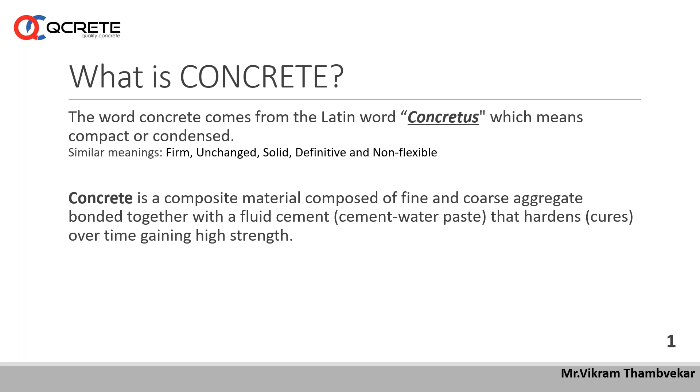This concrete, what it is and other basics, we will not discuss much more, because concrete is a composite material of fine and coarse aggregate bonded together with fluid cement that hardens and cures over time to get high strength, and everybody knows these things. So we'll not discuss much more on these ingredients, basically the type of cement, etc.

Now the point is, use of water for making fresh concrete and using water for curing is very important, because I have seen failures in the Mumbai area because of the use of water. I can't tell you the name of the project or location, but I can share this experience as a case study.

One multi-story building, about five or six floors, was completed, and there was some failure of cubes. We tested all the framing material by extracting cores and other means. After analyzing this material, we found that the concrete used for that RCC frame structure contained a high amount of chloride content, which happened because local people used bore water or well water.

Well, the bore was close to a creek area. So instead of checking the water quality, they straight away used it, and they found some problem with the concrete at a very early age, because the building was under construction.

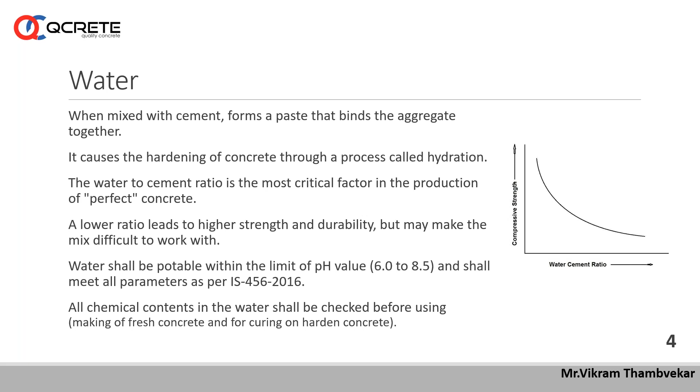If anybody is using curing compound, care shall be taken that all the surface should be moist before applying the curing compound. Then use of cement, minerals, chemical additives, that was already explained very well by Kaushik sir in his last seminar.

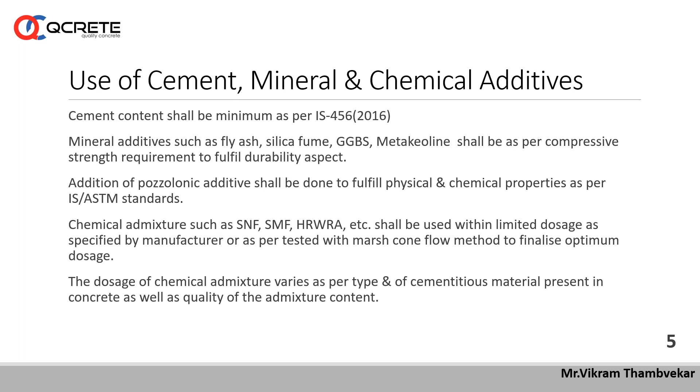I want to say, using quantity of admixture, if it is not in proper proportion, then it may give some adverse effect also. So the use of chemical admixture should be limited as per specification, and before using such a chemical admixture, one should test it for its compatibility with the cement being used.

So this care has to be taken for making fresh concrete. And while making fresh concrete, the sequence of putting material in a mixer, either in an RMC plant, a batching plant, or a regular mixer at site, should be used properly so that all the aggregate, fine and coarse, gets mixed to produce good quality fresh concrete.

To get flowability and workability, the admixture we are using should be used in a proper way. Before using chemical admixture, it should be stirred well so that all the solid contents get mixed with the concrete or with the water. If you use water and chemical admixture together, it gives a better effect.

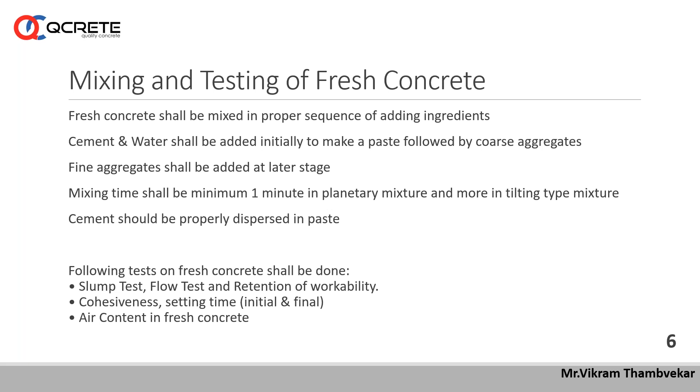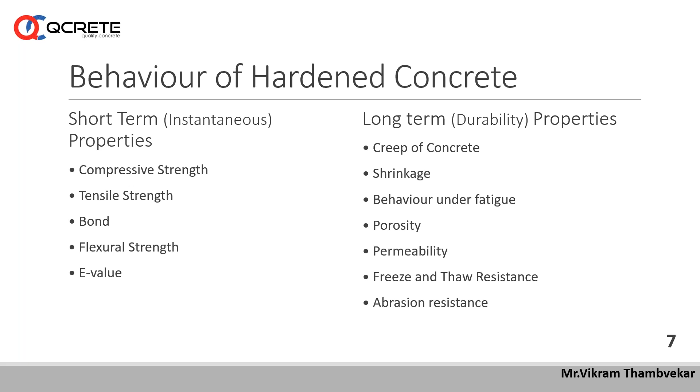Then the behavior of hardened concrete - everybody knows compressive strength, tensile, bond strength, flexural strength, E value, and so many other things that we are regularly testing. We have to run so many tests to get a proper strength of concrete.

We'll see further the factors affecting strength of concrete, etc. There are n number of reasons to make good concrete, and of course there are n number of reasons to lower the strength of concrete also. So these things are mentioned on our slide.

So instead of reading all these things, I'm going further, because the use of fine aggregate, volume of paste, etc., that everybody knows. The temperature effect and percentage of additives are also very important factors for making fresh concrete.

I have observed at one site, a very reputed company and reputed concrete supplier, a higher grade of concrete was used, and there was no final setting for more than 30-40 days or 60 days. When we saw that the final setting had not taken place, we came to know it happened because of excessive use of chemical admixture.

So while making fresh concrete, the use of chemical admixture should be restricted, and as per compatibility of the concrete itself. So for making fresh concrete for higher grade concrete, it is necessary to conduct trials at site, and then go for making fresh concrete for regular use in formwork.

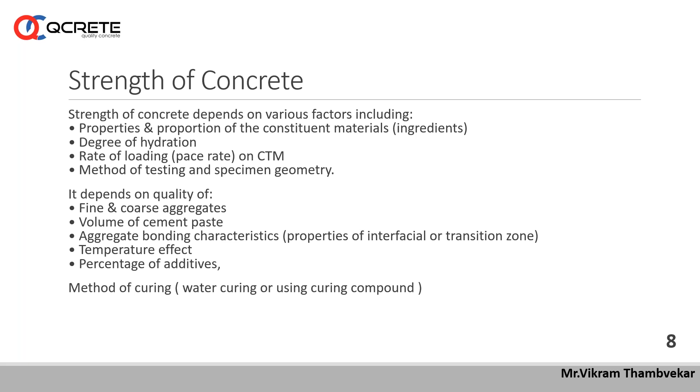The types of concrete are many: plain concrete, normal strength concrete, high strength concrete. Normal strength concrete nowadays for RCC is generally about M20 to M40, and below that, M20, these are the regular concretes used for PCC and other non-structural uses.

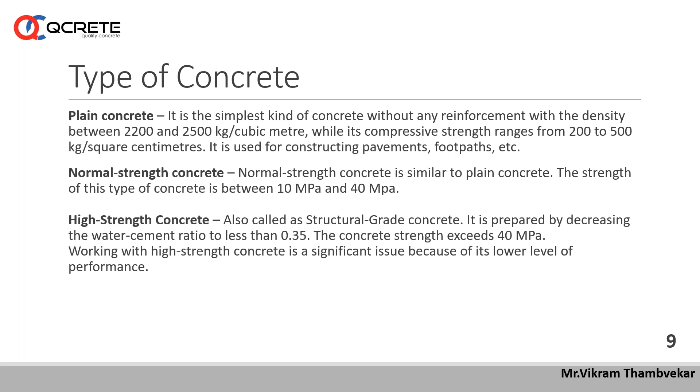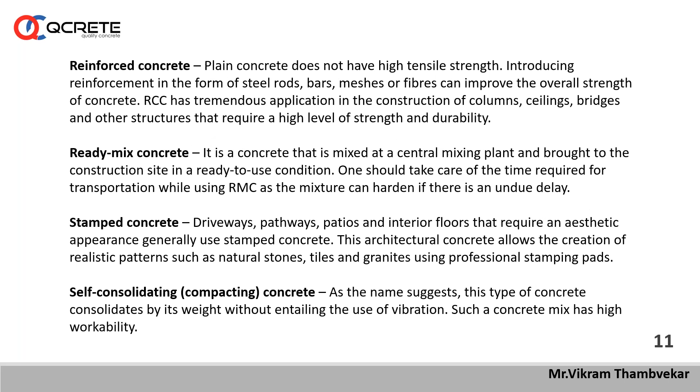So plain concrete, normal strength concrete, high strength concrete, then high performance concrete, ultra high performance concrete, early strength concrete, roller compacted concrete, reinforced concrete, ready-mix concrete, stamp concrete, self-compacting concrete. There are so many concretes being used as per project requirement.

Especially lightweight concrete - its use is required in some special cases where, as per the design of consultants, it is essential to go with lightweight concrete but with proper strength.

Here I want to tell all these attendees that I have provided a design for lightweight concrete, which was used for making a canoe. The canoe was cast by some college students to send it in a competition - an international competition in the USA. So we constructed one canoe with lightweight concrete in Mumbai, at Mukesh Patel Engineering College in Andheri.

That canoe was 450 mm wide by about 5 meters in length, with a wall thickness of hardly 40-45 mm. The canoe was tested in a lake. It was floating very well without any problem, without any leakage of water. The density of that lightweight concrete was only 1100 or 1150.

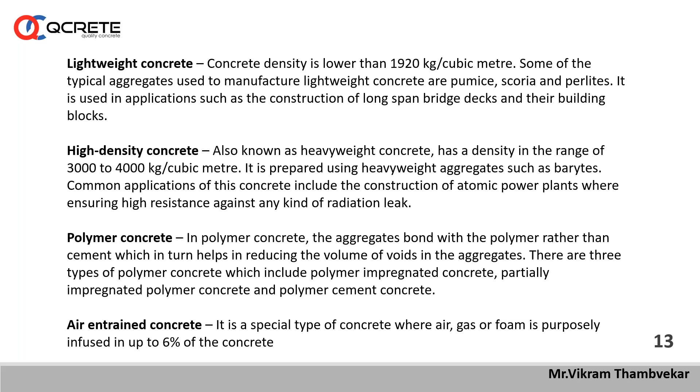So these are the things. High density concrete is used for foundations and other special cases. Then polymer concrete, where people use some amount of polymer, which also depends on project requirement, air entrained concrete, and other things.

Vacuum concrete or Trimix concrete. I want to explain that for industrial warehouses or industrial flooring, people are using Trimix concrete in large quantity. But I generally suggest users avoid using Trimix concrete for this purpose, because they add more water in the concrete while placing it, and thereafter vacuumize the excess water to make it hard. But in concrete technology, using more water increases the water-cement ratio, which disturbs the strength of concrete. Adding more water and then removing it after some time creates a number of pores in the trimix floor area. So this technology of trimix concrete is not much more advisable.

Then pump concrete. Pump concrete requires a slump of minimum 150 and maximum up to 250, 300, 400, depending on the length and height of piping or the structure where you are placing the concrete. I want to tell our friends to avoid pumping concrete in hot sun when temperature is very high, say about 35 degrees, because the MS pipes get very hot. Even though there is very good flow and workability in the fresh concrete, the heat of hydration in the concrete coming through the pipes causes it to start setting at an early stage, and finally it creates difficulty for pumping.

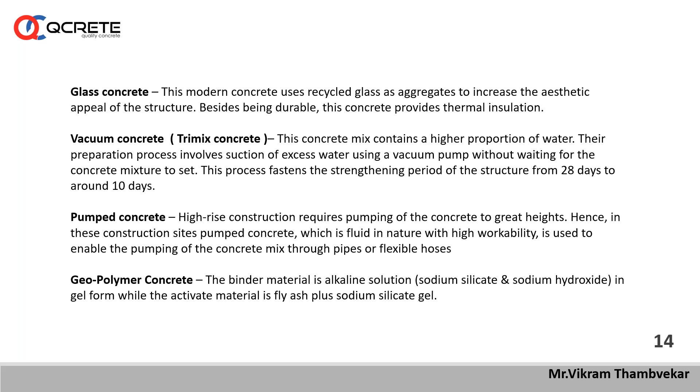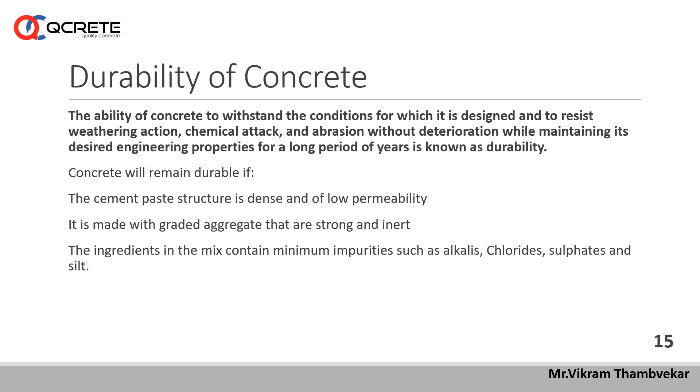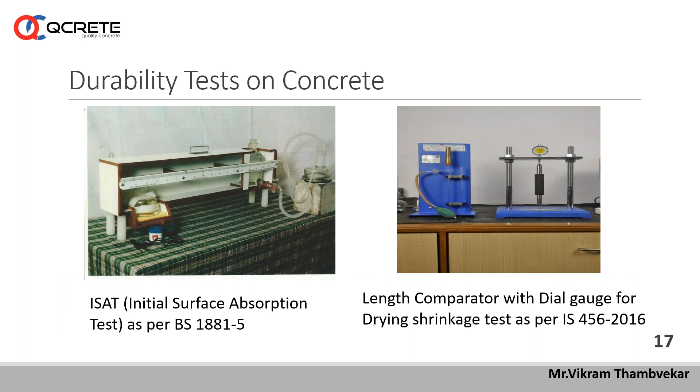Durability of concrete is also a very important aspect of its use. For all high-rise buildings, various durability tests are followed everywhere. In Mumbai area, for high-rise buildings, very reputed project executors regularly test durability, like RCPT, water permeability, ISAT, drying shrinkage, and so many things. Because if proper durability testing is not done, there will be problems, as it is a very important factor for high-rise buildings.

The factors affecting durability of concrete depend on various parameters: cement content, other binder content, quality of aggregate, quality of water, and use of admixture, type of admixture, etc.

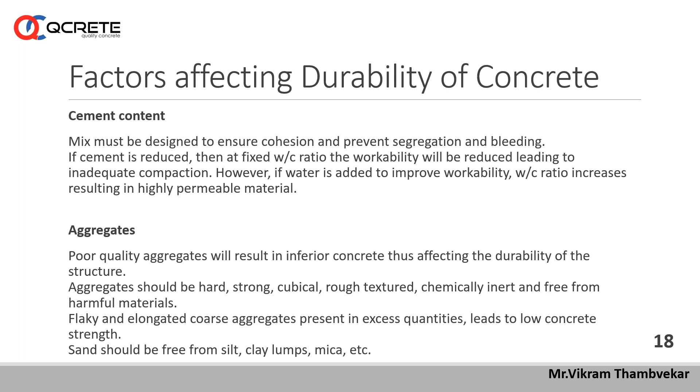When RMC is supplied at site as fresh concrete of very good quality, if proper precaution is not taken to discharge the concrete properly, achieve good compaction, and good curing, durability is affected, as well as strength, and finally durability also affects the structure. So we have to take care of all these practical uses of concrete at site, even though very good quality fresh concrete is delivered. I have seen that because of wrong application at site, many problems have arisen for structures.

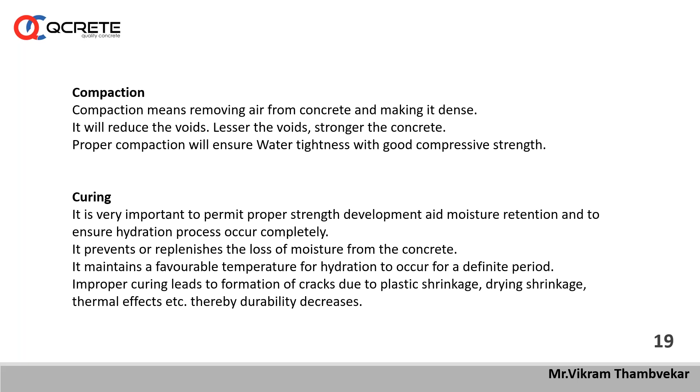Curing is also a very important factor. All project people should use only potable water, or if well water or bore water is used, its pH and other parameters like chloride content, sulfate content, and so many things laid down in the code should be checked properly, and only then can that water be used to make fresh concrete or for curing.

Permeability is related with the durability. If you are checking the permeability of concrete, if high permeability is there, then of course there is a reduction in strength of concrete. So make a proper concrete with the proper design, proper compaction, and proper cover, etc. There are so many things which many people know very well.

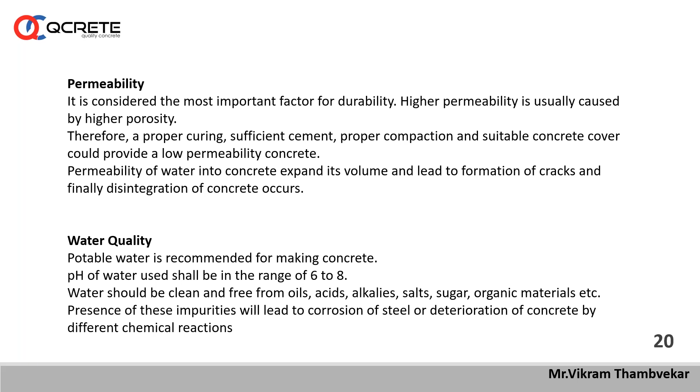Again here the point has come that water quality. Quality of water is mentioned in IS code, that the pH should fall within the range of 6 to 8, and instead of going for all this, the water which is used for drinking shall be used straight away to make fresh concrete, as well as shall be used for curing purpose.

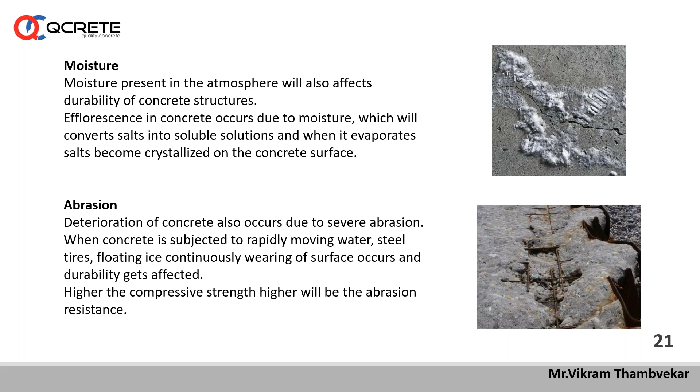Then other factors affecting the durability, that is the moisture content, abrasion, carbonation, wetting and drying cycle, alkali aggregate reaction, silica alkali reaction. See, in Mumbai region and in most part of India, apart from the North Indian part, we are getting very good quality of aggregates, which we are using for making fresh concrete.

Here we find better quality of aggregates as basalt stone is available, whereas in North region, at many places, the stone quality of aggregates are not good. At many places we observe it contains some amount of silica, so such type of aggregates shall not be used. This particular precaution has to be taken where project is going on in North India, especially in North India. I have visited some sites and observed good quality of aggregates are not available. But in the rest part of India, we are getting very good quality of coarse aggregate and very good quality of natural sand also.

In Mumbai and surrounding areas, and in many places in Maharashtra, nowadays river sand is not available, and people are using manufacturing sand, or in other words, stone dust or crushed sand. While using crushed sand, it has to be tested with sieve analysis instead of using it blindly. And if better quality of crushed sand is not available, then use of crushed sand should be limited as per the mix design requirement, or to meet the other parameters of the fresh concrete and better strength level also.

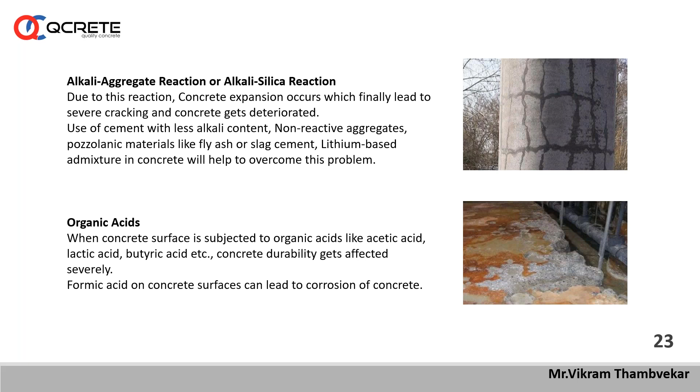Secondly, precautions for raft foundation casting. For many high-rise buildings or industrial buildings where raft foundation is there, with larger size and where depth is quite big, that is above 1 meter, 1.5, 2, 3 meter. In Mumbai, for high-rise buildings, we have seen some depths of raft foundation were 2.5 meter up to 3 meter also.

So it's not possible to make concrete in one stroke for all this volume, because the volume of concrete is very high. So concrete is poured in different stages, or at site some pockets or areas are prepared to provide the concrete for this raft, as the volume is very high.

So while putting this fresh concrete in a high volume, it is necessary to check the temperature of fresh concrete which is poured, because due to the high volume of concrete, the CSH gel forms and creates a very high amount of heat of hydration, and due to heat of hydration, there are chances to develop micro cracks or hair cracks in the concrete.

To control the heat of hydration, in many mix designs, fly ash and GGBS are being added. And of course, before using all such cementitious material, necessary trials should be conducted to ensure the strength level as well as heat of hydration and air content also. So temperature monitoring is a very important factor for this raft foundation.

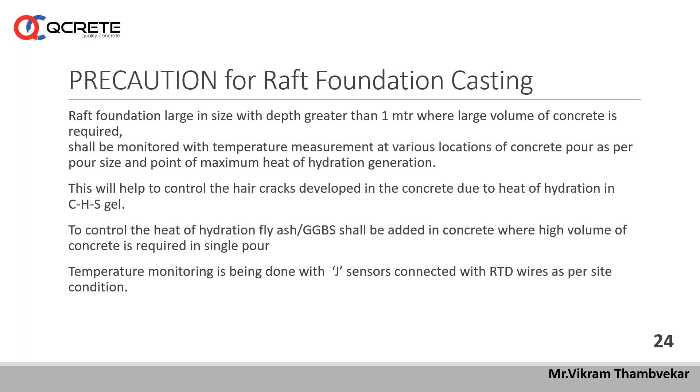Nowadays there is one terminology being followed in the field, that is performance based concrete. Now anybody will ask, what is performance based concrete? Some consultants assume or insist to put some amount of silica fume, Alcofine, GGBS, etc. apart from OPC or PPC. So how does it get benefited?

Of course that benefit is very limited when these additives are used up to 8%. But if you are going beyond that, it gets benefited to a certain amount. But whether it is required or not, for up to M40 concrete or M50 concrete, as far as my knowledge is concerned, it is not required at all, if we are using very good material and a proper mix design.

See, we have produced up to M50, M55 grade of concrete without using any cementitious supplementary product such as silica fume. Only fly ash we have used in a certain percentage to get good workability and good paste, to have a good finish and good strength also.

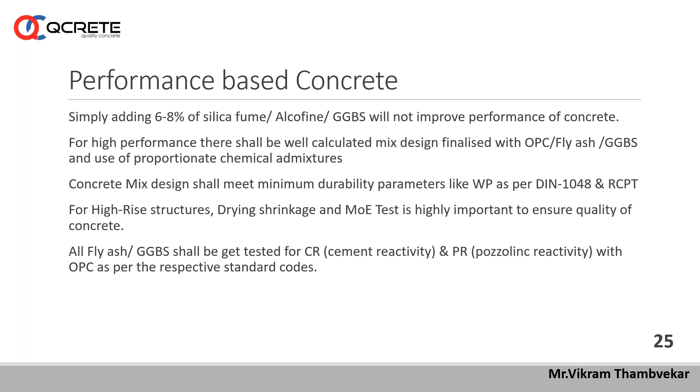Further, when we are putting fresh concrete in projects, we are casting RCC frame structures. Somewhere what happens, people get less compressive strength at site as they cast the cubes of fresh concrete.

But casting of cubes with fresh concrete is also very important. If anybody is not casting cubes properly, even though the fresh concrete supplied at site is very good, wrong practice of casting the cubes or not compacting them properly as per methodology—that is 20 strokes, 30 strokes—and if the cubes are not of proper shape, or if the cube mold itself is not tightened properly, the shape gets disturbed. Secondly, if cubes are not cast properly and not cured properly, it directly affects the strength of concrete.

And then people worry about why the strength came out this way. So to ensure what the concrete has provided in the frame, like a beam, column, slab, or foundation, etc., there is a procedure to check—some test at site that is called non-destructive test, which everybody knows.

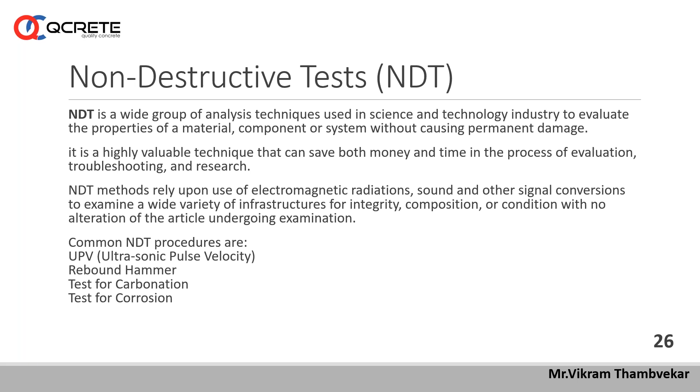With the help of rebound hammer, we can determine the apparent value of compressive strength, and then decide whether the concrete is acceptable or not. As well, with the help of UPV, we can determine the density of concrete. Because if concrete is not properly compacted, there are chances of honeycombing or porosity in the concrete section, which can reduce the strength of concrete. So with the help of NDT, it should be determined, and proper remedies can be applied.

The process followed here is a direct method, and another method is the indirect method. In the indirect method, there are different calculations, and of course some amount of 0.5 kilometer per second velocity was to be added, as given in SP 23. Now that factor has also been removed. So as far as possible, better to check the UPV test with the direct method, and wherever that is not possible, one can go with the indirect method. Readings should be taken properly, and all measurements of distance should be measured properly to calculate the UPV values.

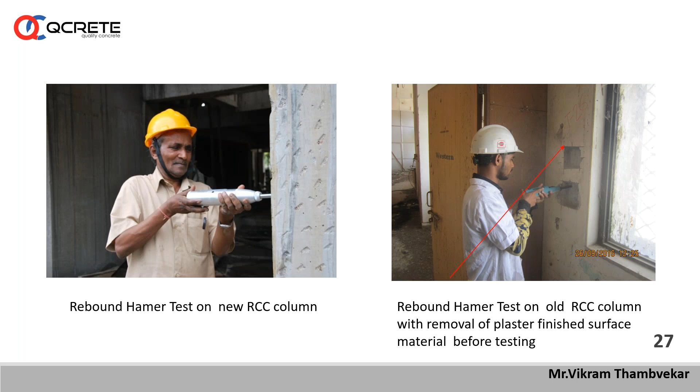I have seen at many places people using the hammer test directly on plastered material, or following the UPV test directly on plastered material, which is totally wrong, because we are not testing the finished material but the original RCC structure to assess the position of the structural member. So these precautions anyone should take—remove all finished material, prepare the surface properly by making it smooth, removing greasy or oily material, etc. These things are very important to take care of in testing methods.

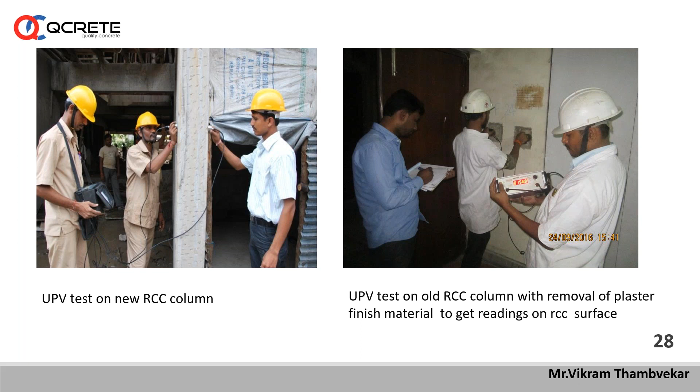Here I want to explain that even though in a local area with local material, we used a very good fresh concrete by controlling water cement ratio and proper proportioning of the local material. This site is very close to the sea, at a coastal area in Raigad district of Maharashtra. This particular canopy is still there without any problem, without any cracks. Of course, a very light section was used. The thickness of this cantilever slab is limited to 150 mm to 100 mm, and the grade of concrete was not more than M25.

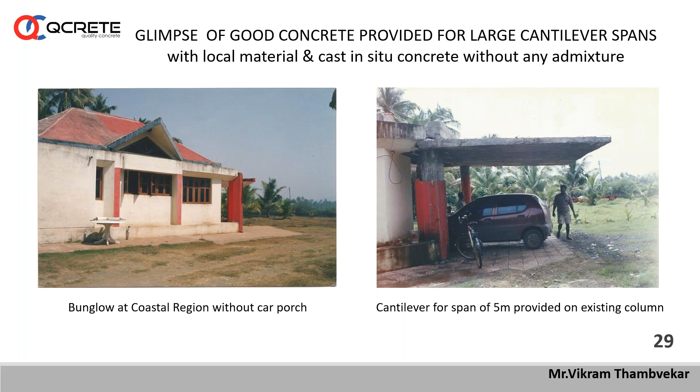So even though we produce a very good concrete, or procure a very good concrete from RMC plants, if we are not using it in a proper way at site, many problems can happen. One should not blame the concrete supplier, but should see what went wrong at our site, how the people have worked or executed the job.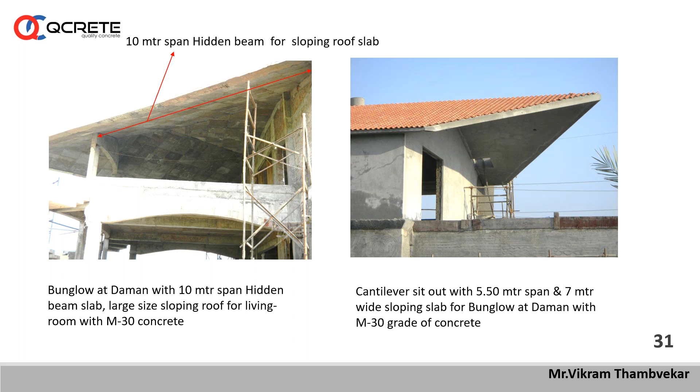For this mix design, we used only 10 mm down, meaning 6 to 8 mm size aggregate obtained by sieving from 10 mm down, and of course cement content along with some mineral and chemical additives. We used these, and the steps of this entire spiral staircase are only 75 mm thick, only 75 mm thick.

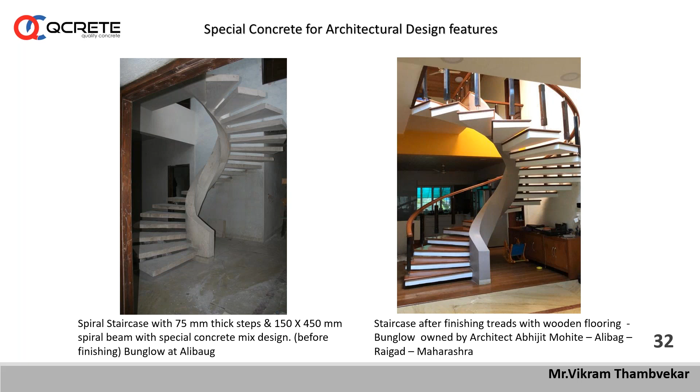Thereafter I want to discuss what causes failure of concrete structures, which we have discussed at some level before. Incorrect selection of concrete materials may be a main reason of failure, as well as errors in mix design calculation and preparation of fresh concrete, improper construction techniques, and insufficient quality control and supervision. Then there are chemical attacks on concrete structures, incorrect construction joints, poor compaction, poor curing, and chemical attacks due to chloride, sulfate, acid, carbonation, alkali reaction, etc. These are the main parameters.

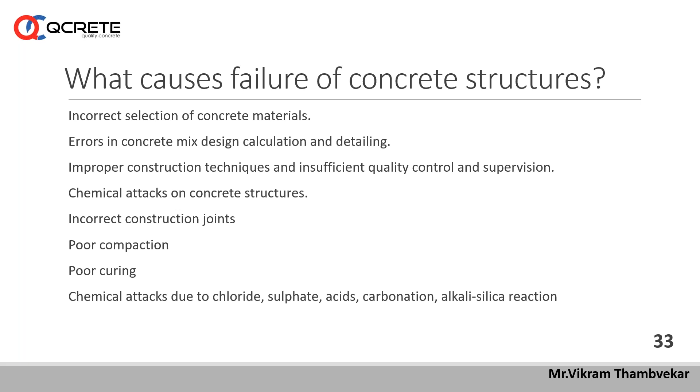Here we can see the concrete is being discharged from height without using any chutes. What happens when we discharge concrete material from higher up is that all the cohesiveness of concrete gets lost, and the coarser material gets separated. So indirectly we can say segregation takes place. Because of this wrong application there is a problem with the structural strength, durability, or serviceability.

So in this case we can't blame any RMC supplier or concrete supplier, but precaution shall be taken at site to place the concrete in a proper order by making chutes, and all the slurry and finer material should be discharged properly and mixed with the concrete, and compaction should be made properly.

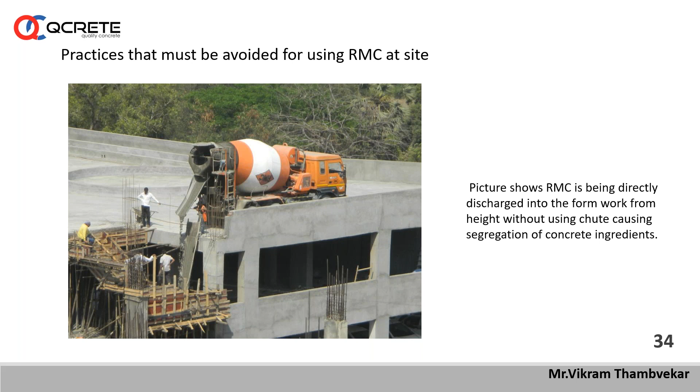So here I again and again explain to all these attendees to use fresh concrete, either made at site or delivered by RMC. Here I can show you one slide as an explanation of how things go wrong when your mix design or something goes wrong at the production level. Why this happens, I'll tell you in the next slide. So let me start this video - please look at this video very carefully.

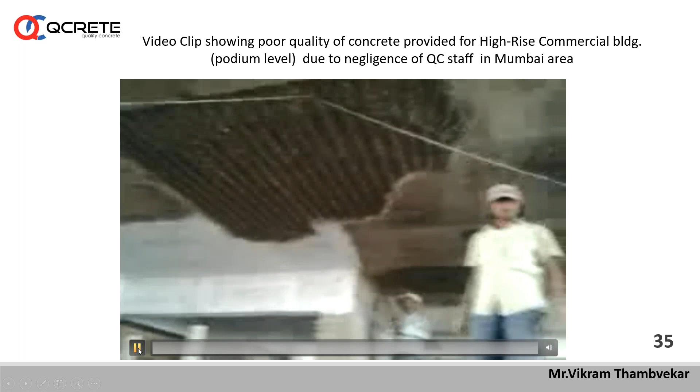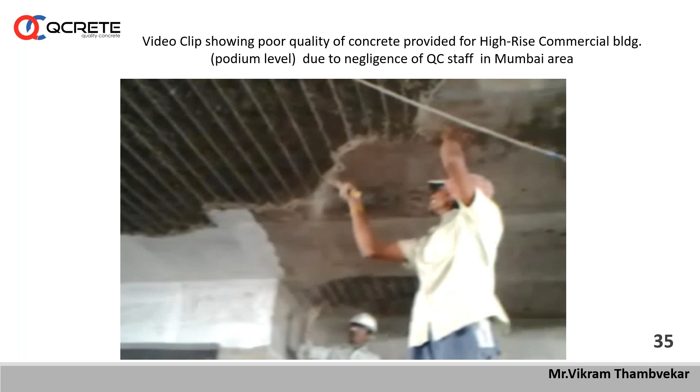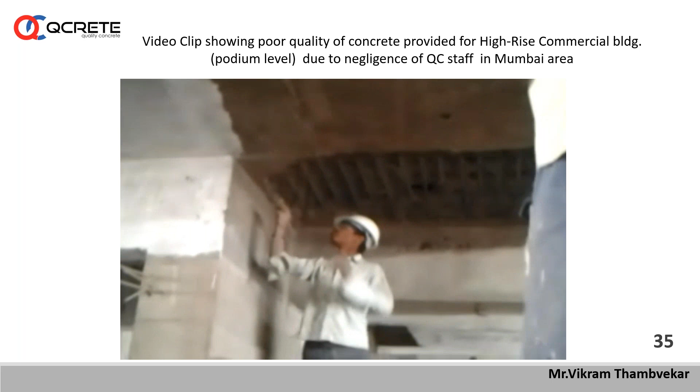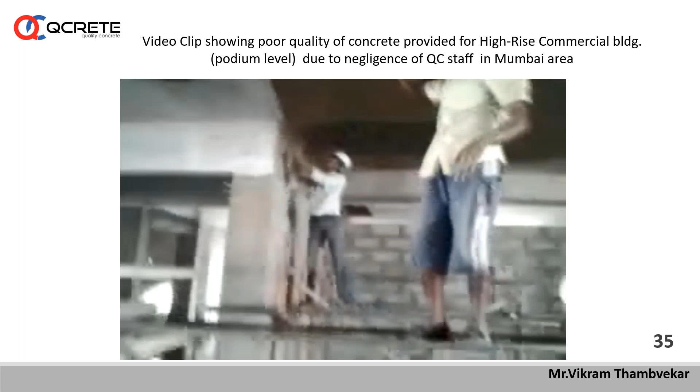Dear friends, see here the concrete provided for this slab, this podium slab. This person is removing the concrete very easily with the help of this tacha, or hammer - a pointed hammer. If this concrete was properly mixed, with correct ingredients like cement, then this would not have happened. We can see very easily he can remove the concrete, and all this powder material is coming out - only powder material. It has not bonded at all. Look at this video till the last, then you'll find there was no proper mix provided.

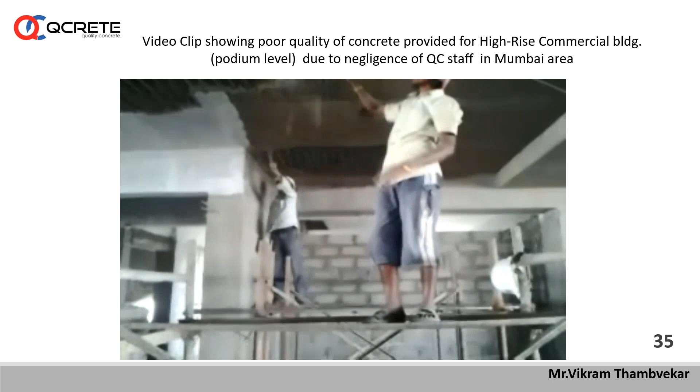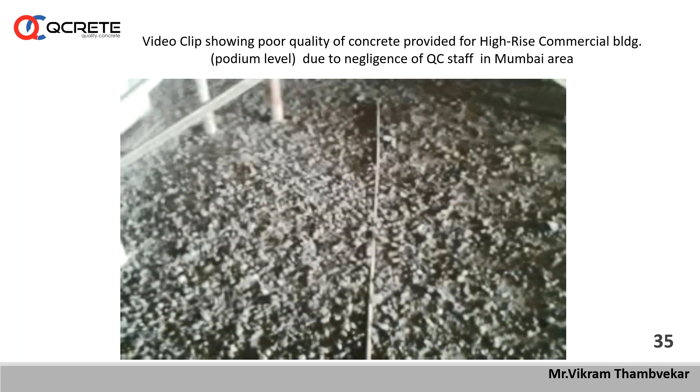Before using it for this particular slab, no one has taken care to check it at site. See here, all this aggregate has fallen here, and these aggregates are totally free from paste. There is no paste of cement or any cementitious material. It means there was no bond between the coarse aggregate and the cement paste.

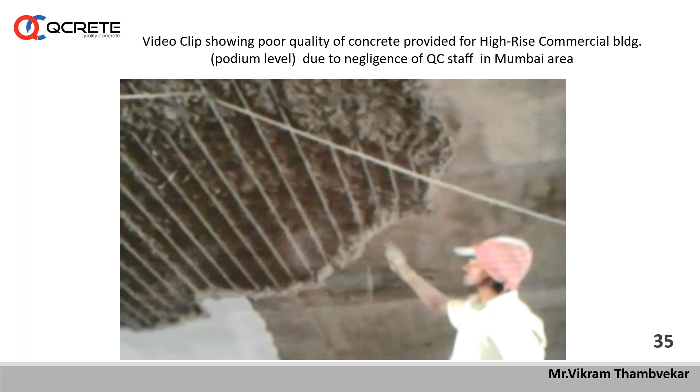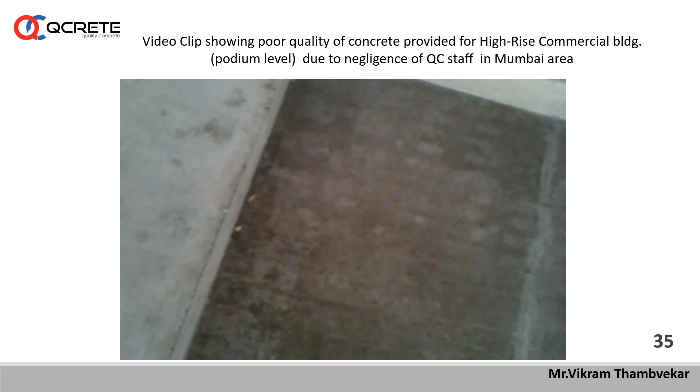So these things can be avoided by taking care to make fresh concrete. The users of concrete should also take care that before using such concrete directly into the formwork, they have to test at site or observe the quality of material. Expertise is required to understand the nature of concrete, and only then can they judge whether this concrete is okay or not. So some tips are there, I'll show you here.

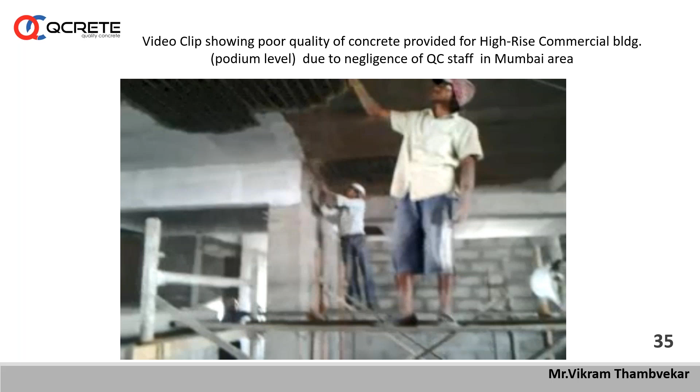See here, another picture I'm showing you. The people used fresh concrete at site without checking anything, and that slab got sagged - a number of cracks were observed. When we tested it, we found the concrete was not proper, so we told the client to demolish this particular slab and recast it with good concrete. Of course, while recasting any RCC member, care shall be taken at joints because it's a dry joint, so proper care shall be taken while putting fresh concrete near hardened concrete.

So these precautions are to be taken. Before using any concrete for anything, it should be tested properly in the fresh state also. One should have good expertise to understand its cohesiveness, to understand segregation, to understand bleeding of concrete, etc. That comes from following regular good practices at site or making trials in a laboratory or a site laboratory.

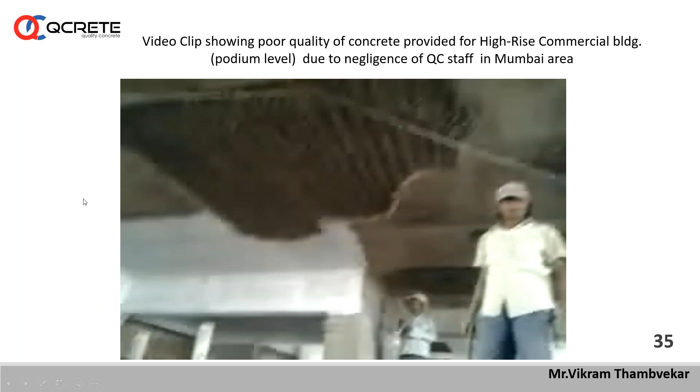I want to explain that manufacturers should take proper care to discharge cementitious material into the correct silos. Generally the bulker comes late at night, and an unskilled person like a watchman discharges it without knowing which is the cement silo and which is the fly ash silo. Because of such bad practice, if different material goes into different silos, your mix design recipe goes wrong. So it is very necessary to discharge the right material into the right silos.

When cement comes from the factory, they issue a test certificate, but some amount of powder material or cement should be taken from your silo or bulker and sent to the laboratory to check properly for cement reactivity, pozzolanic reactivity, or cement strength as per the relevant code. It's good practice to test cement regularly, because when the silo stands in hot sun, there is some effect on it, so periodical testing is very important.

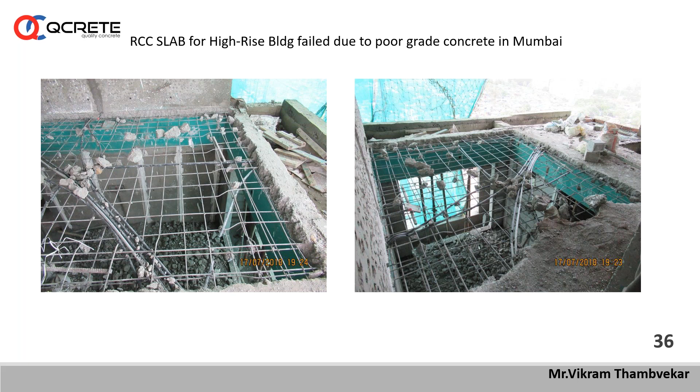Then I explained about contaminated water used to make fresh concrete. Take extra care when using well water or bore water, and it's good practice to use potable water itself.

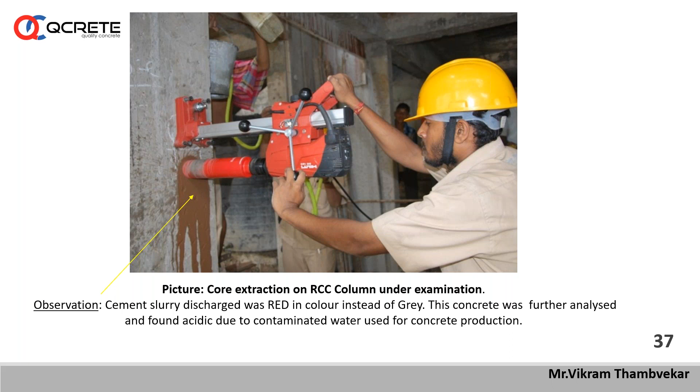We can't say there's a problem with the RMC or the concrete itself. There may be a problem with application, or the finer material was not mixed properly and only coarser material went to the bottom of the column. So placing of concrete is a very important factor that should be taken care of for all types of structures, not only high rise.

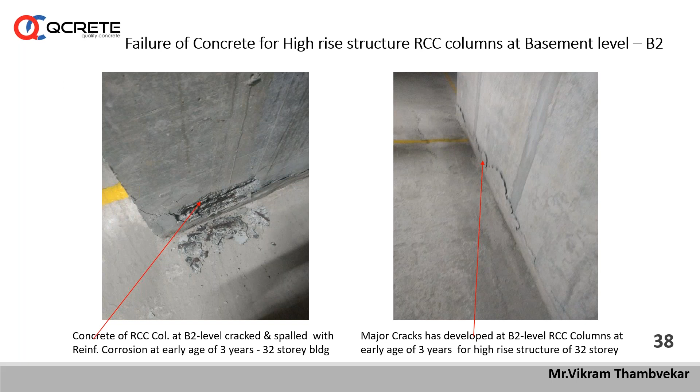In our next slide, a very important topic: precautionary measures for multi-story or high-rise structures. Why am I insisting on all these points? Because I have seen many engineers follow wrong practices while casting the columns and slabs.

I don't want to name any building or project, since that's restricted for us. But in Mumbai, there was a high-rise building, about 20 stories. The project engineer used the same grade of concrete suggested at footing level for all columns and slabs everywhere. Finally, when the cubes were tested, instead of M40, the concrete strength was found to be between M30 and M35, below M40. The consultant investigated further and found all these columns were cast in M30 instead of M40.

So I request all engineers and project heads to keep a practice of studying architectural plans and structural drawings carefully before execution starts at site. Don't hesitate, don't rush. Study all the drawings carefully, and discuss any points with your seniors, your consultant, and your RMC suppliers before placing the proper order of concrete.

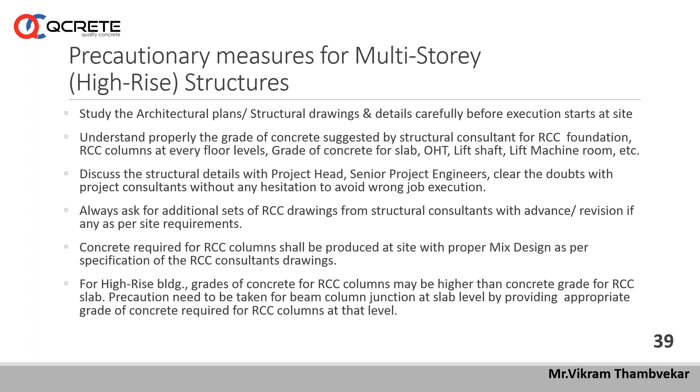This particular point is often not noted by the consultants. So what to do in that case? I have suggested one remedy here to all project executors at site. It is simple but very important, and it should be used very carefully.

If the RCC column concrete grade is slightly higher, say M40, M45 or M50, and the grade of RCC slab is slightly lower, say M30, and if you are not ordering a different grade of concrete for the column-beam junctions, then if you only have the slab grade concrete, a thick cement paste or thick slurry in sufficient quantity should be used.

Sufficient quantity means if you make a very small quantity of slurry and pour it, it won't help. You have to make it in a large quantity, say one or two buckets, depending on the size of the joinery or junction.

This sufficient quantity of slurry shall be added to the M30 grade or lower grade concrete ordered for the slab, with proper mixing, pouring this slurry along with the lower grade concrete together. It should be compacted properly so it mixes with the lower grade concrete, which will improve the strength required for the column and beam junctions to meet the desired grade for columns. As the cement content increases in that particular part, some amount of strength will increase.

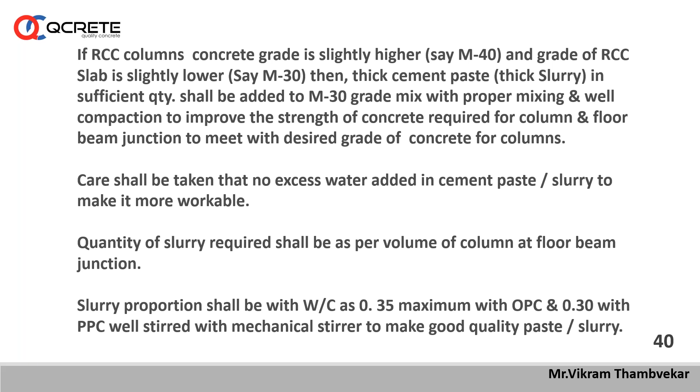Quantity of slurry required shall be as per volume of column at floor beam junction at that particular level. Slurry proportion shall be with water cement ratio not more than 0.35 with OPC and 0.30 with PPC. You have to use a lower water cement ratio for PPC, up to 0.35 for OPC. All the slurry should be very well stirred with a mechanical stirrer to make a good quality paste to add in your fresh concrete.

These are some points I'm going to explain at the site, after shuttering and centering, when reinforcement is placed on the centering and shuttering at slab level or at column beam junction level. Many times I observed oil remains as it is with the shuttering, and coated on the reinforcement provided. So all such oily material should be cleaned very well with cotton waste or cotton cloth, so that bond of concrete with the reinforcement should not get loosened. This care must be taken at every site, at every level of RCC slab, beam or column. No greasy or oily material should be stuck with the reinforcement, because such mistakes disturb the concrete and reinforcement steel bond.

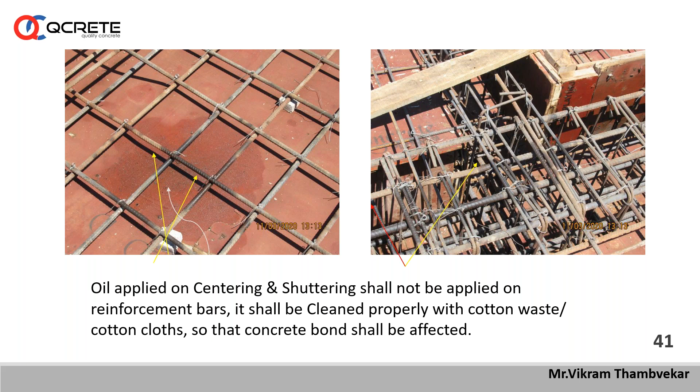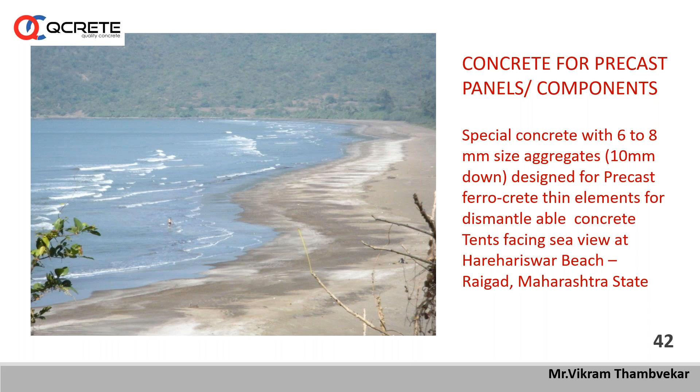This is very important to tell here because all these elements are only very thin, just 35 mm thickness. This is a view of our resort where all these concrete tents have already been installed and are under use since the last 13-14 years.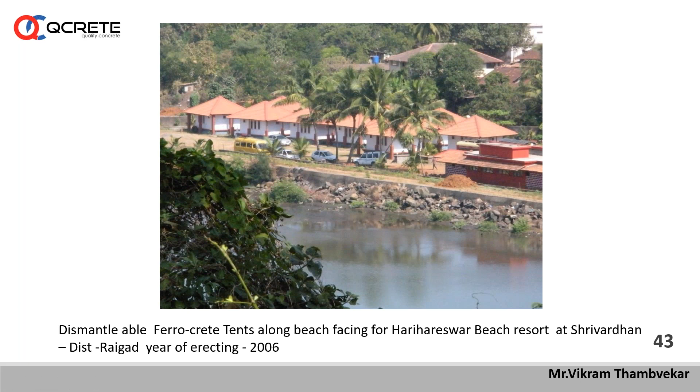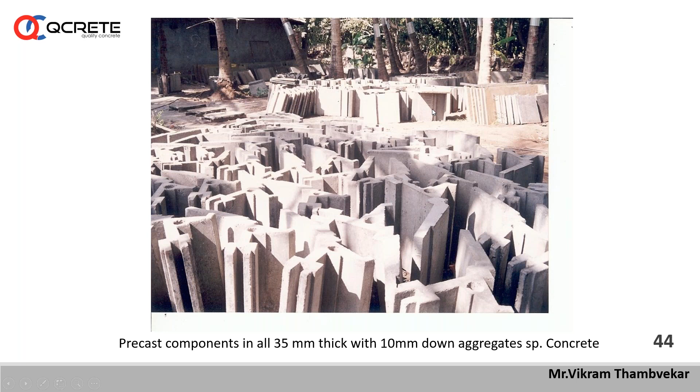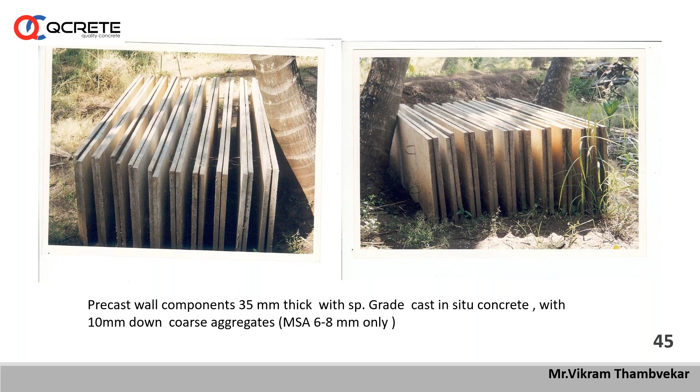These are some precast components casted for erecting all these concrete tents. These are joinery material and other components required as per design. These particular sheets look like plywood sheets or cement sheets, but they are the precast panels casted with 35 mm thickness for the wall component for all these concrete tents.

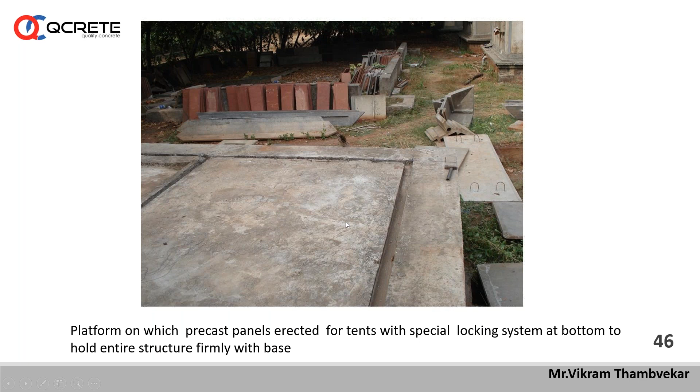I'm explaining this only to show you how concrete is important for any kind of structure, from a durability point of view as well as for very effective use in structural designs. When your concrete design is very good, we can go with very sleek and thin structural members. This is the area where we have placed the wall units or vertical wall components.

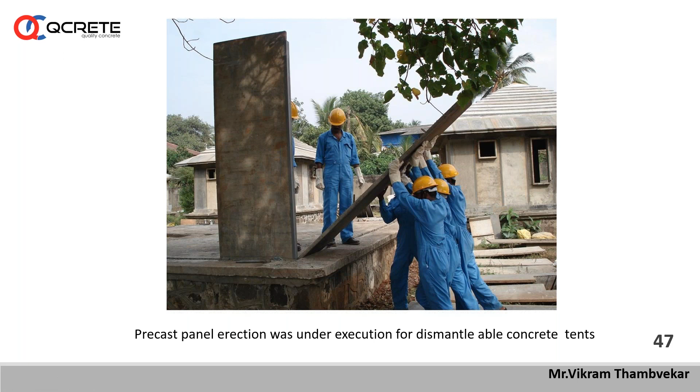In this slide we are showing the vertical components which were cast in a yard and are under erection at site, and in the background you can see the other structures already erected properly as per the different components. Here this corner portion is ready, the erection is ongoing, and this corner area is packed or erected in part, and behind that you can see the sea area.

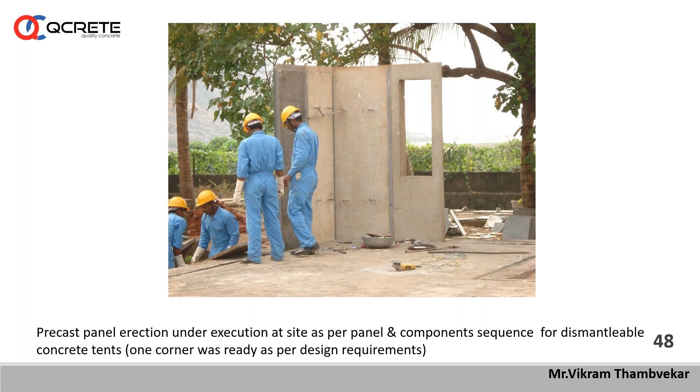These particular tents are facing the sea. In this slide we can see the thickness of all these wall panels is only 35 mm, not more than that, and all these vertical panels are taking the entire load.

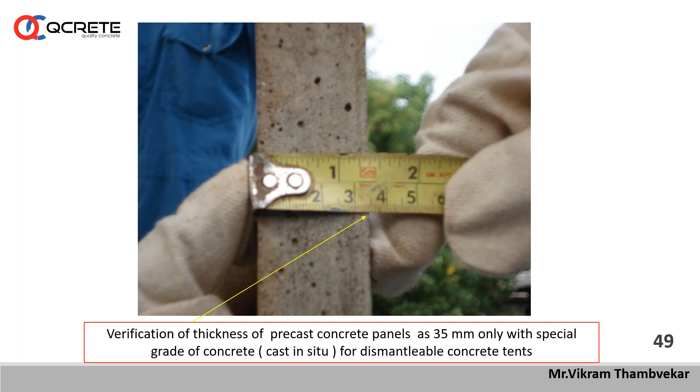In this recent cyclone, nothing happened to our structure and it remained intact. Even before that, 2-3 small earthquakes occurred in that area, but nothing went wrong there.

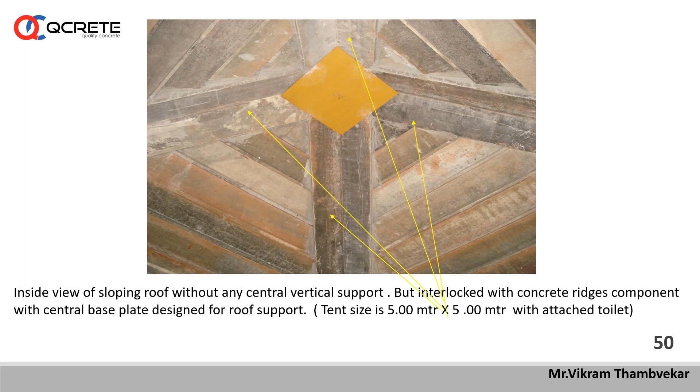I had presented this particular presentation at IIT Roorkee for all these precast components, and most people appreciated it. Some officer was present from the Himachal area. He called me to give some order, but since that order was very small, I said make it larger, then only it's possible for us to cast the components in Maharashtra and deliver at site in Himachal Pradesh. So because of financial aspects and transportation, we could not fulfill that order.

So these are the points I want to highlight, how concrete can be effectively used for any RCC member, whether for high-rise, industrial buildings, or smaller buildings. If we take care of fresh concrete and hardened concrete, everything will go fine, nothing will go wrong. All the problems that arise for structures are majorly because of the application, very few because of the mix design. The major problem happens at site because of job execution. So I request all engineers, site engineers, to take extra care to execute your job in a proper, very effective way. Then only we can get a very good result with concrete.

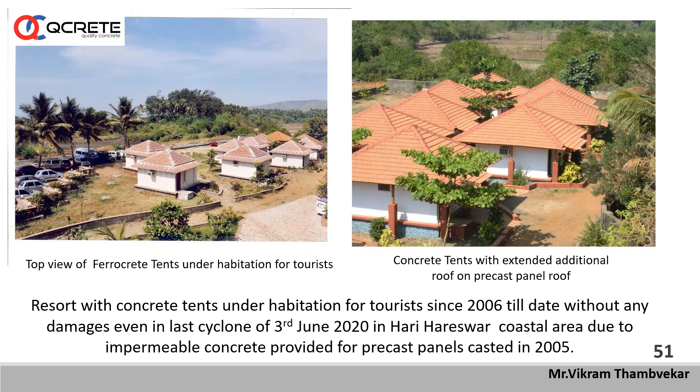In a very short time we have explained some points to the best of my knowledge, and of course our whole subject cannot be covered very well in a very short time, because there are a number of issues and we have limited time. With the limited time, I have tried to explain and give some better tips. I think you got some points which are helpful while executing the project.